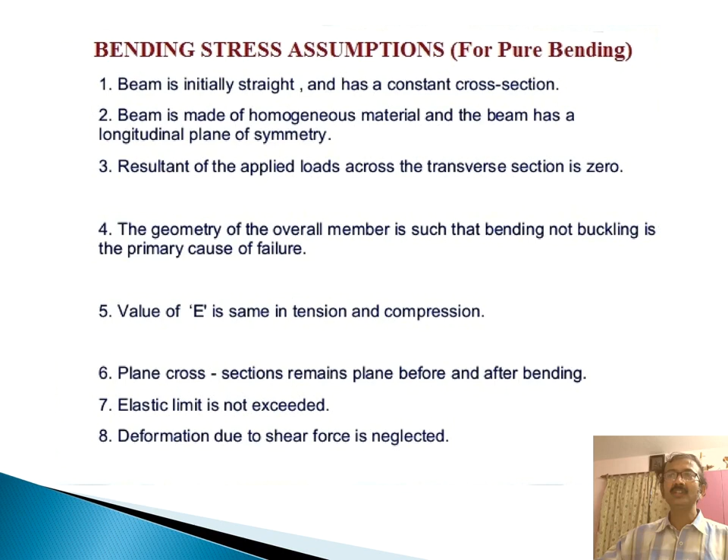Now in the case of pure bending, if you see the diagram, this is the diagram of an overhanging beam. This overhanging beam is subjected to 2 point loads at the two extreme ends, that is, W and W are the 2 point loads, A and D are the 2 points. So from the shear force diagram, it is clear that the part BC has no shear force. So this is only for pure bending.

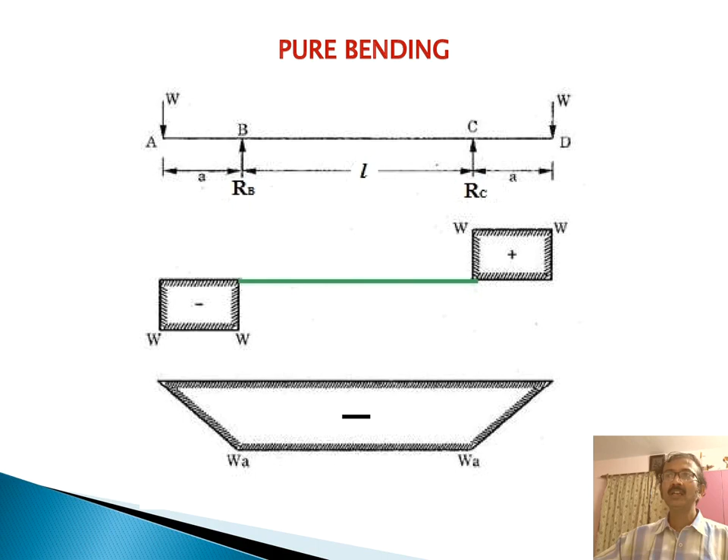Now the layer GH after bending will be converted to G'H', and the length will be increased. After bending, from this figure it is clear that G1H1 will be (R + Y) dφ. Now the change in length of the element dx, that is G1H1 minus GH, is finally Y dφ. Now the strain on that layer is nothing but the deformed length divided by the original length, so finally Y by R.

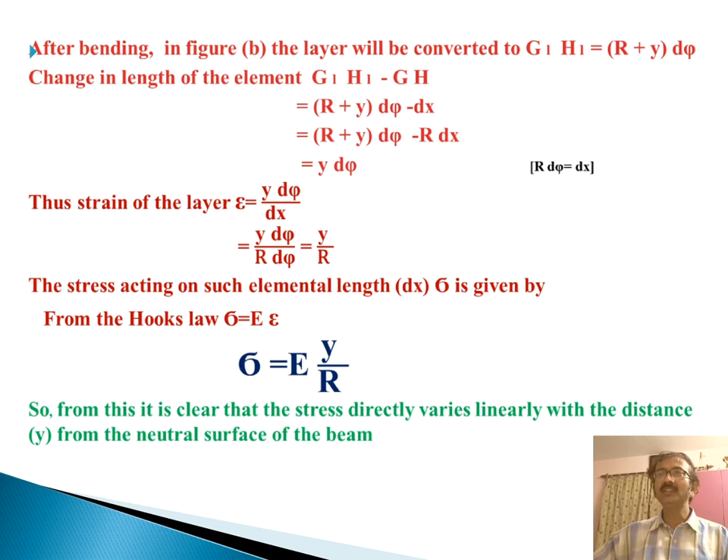The stress acting on the element dx, that is sigma, from Hooke's law we know that sigma equals E into epsilon. So finally sigma equals E into Y by R, where E is the modulus of elasticity, Y is the distance from the neutral axis and R is the radius of curvature. From this it is clear that the stress directly varies with the distance from the neutral surface of the beam.

Now from diagram 1, it is the part of the beam and NA is the neutral axis. Just above the neutral axis, the portion is subjected to compressive force, and below that, tension. And diagram 2 is the transverse section of the beam. Now we consider a small elemental area dA at a distance y from the neutral axis of the beam.

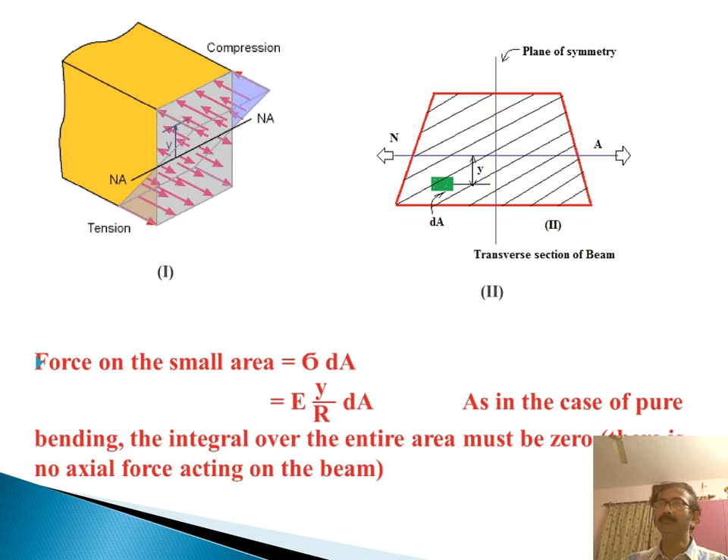Now the force on the small area is stress into area, that is sigma into dA. So the value is Ey by R into dA. As in the case of pure bending, the integral over the entire area must be 0, so there is no axial force acting on the beam. After integration we get E by R times the integral of y dA equals 0. E by R is a constant term that is not equal to 0.

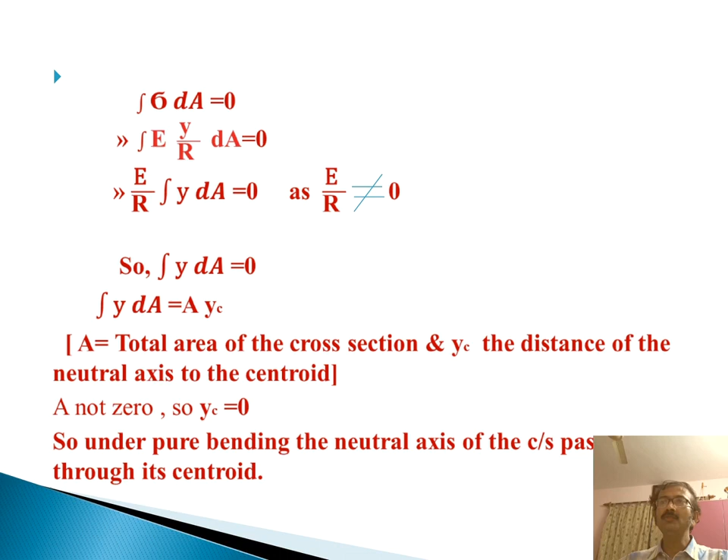So obviously the integral of y dA equals 0. The integral of y dA is nothing but A into yc. As A is the total area of the cross section, this is not equal to 0. That's why yc is 0. So under pure bending, the neutral axis of the cross section passes through the centroid.

Now take the moment of the elementary force, that is sigma dA, about the neutral axis, and integrate it over the whole cross section area. So the moment is the force into distance, integrated over the entire area. Finally we get the moment M equals E by R times the integral of y squared dA. This y squared dA is the area moment of inertia of the beam cross section about the centroidal axis, the second moment of area or moment of inertia.

It is denoted by the symbol I. So M equals E by R into I. So 1 by R equals M by EI. So finally we get sigma equals My by I.

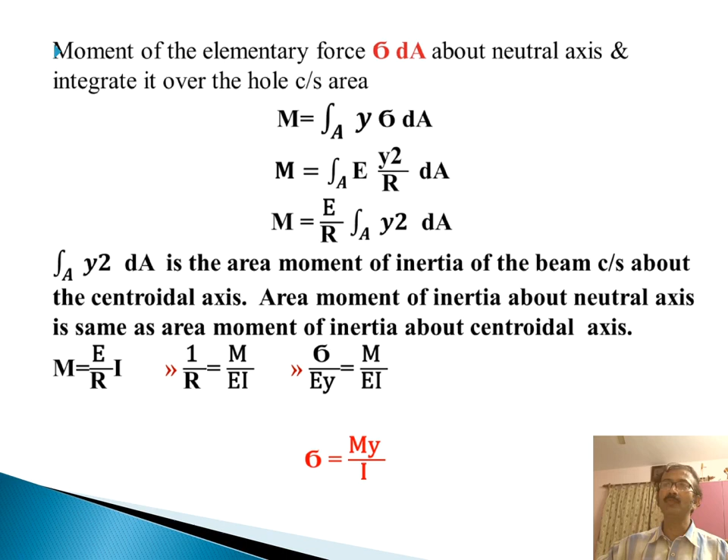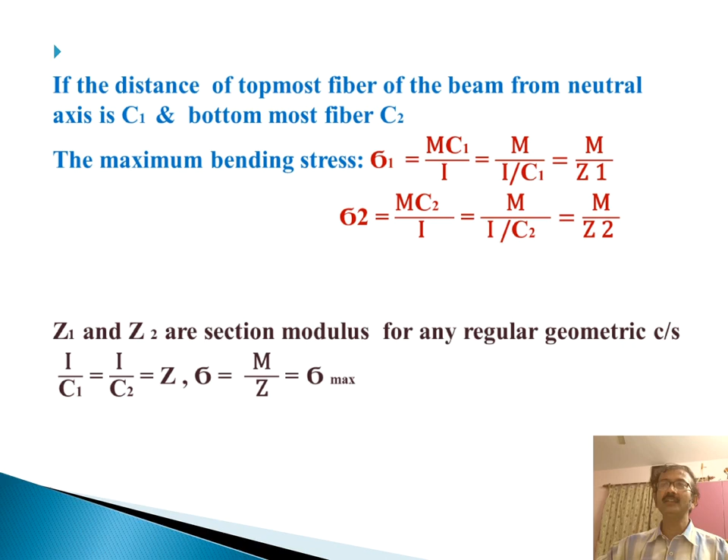Now if the distance of the topmost fiber of the beam from the neutral axis is C1 and the bottommost fiber is C2, the maximum bending stress sigma 1 is MC1 by I and sigma 2 equals MC2 by I, where I by C1 equals Z1 and I by C2 equals Z2. Z1 and Z2 are the section moduli for any regular geometrical cross section. So finally sigma equals M by Z, that is sigma max.

Now there are two cases, one for rectangular section and another for circular section. In the case of a rectangular section, where b is the width and h is the height, I equals bh cube by 12 and C1 equals C2 equals h by 2. So Z equals I by C1 equals I by C2 equals bh squared by 6, where Z is the section modulus. Finally sigma max equals 6M by bh squared.

Now for the circular section of diameter d, the moment of inertia I is pi d to the power 4 by 64. So C1 equals C2 equals C equals d by 2. So Z equals I by C. So sigma equals 32M by pi d cube.

Finally sigma by y equals M by I equals E by R. This is known as the flexure equation of the beam, and the whole theory is developed for pure bending.